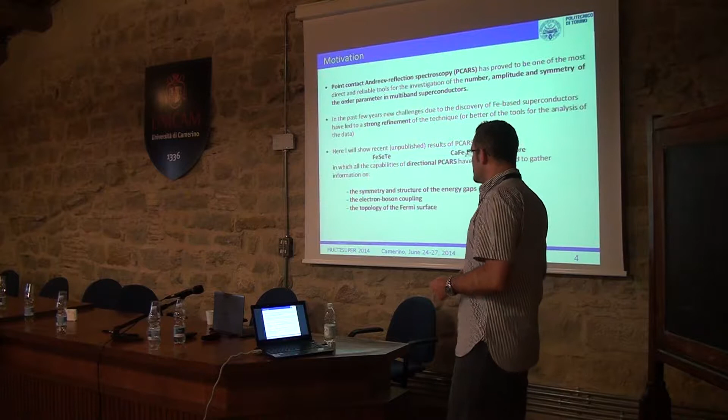Here, I will show some recent, still unpublished results of our group in iron selenium tellurium and CaFe2As2 under pressure, in which all the capabilities of point contact spectroscopy have been exploited, in particular its sensitivity to the symmetry and the structure of the energy gaps or order parameters, its sensitivity to the electron-boson coupling, and its sensitivity, which is in some sense only qualitative, to the topology of the Fermi surface.

Well, point contact spectroscopy is a very simple technique, powerful but very simple. It consists simply in making a small contact between a normal metal and a superconductor. We use what's called the soft technique, in which there is a gold wire which is stretched across the sample surface and kept in place by a small drop of silver paste. In this case, the contact is actually not only one, but a network of contacts established between single silver grains and the crystal surface.

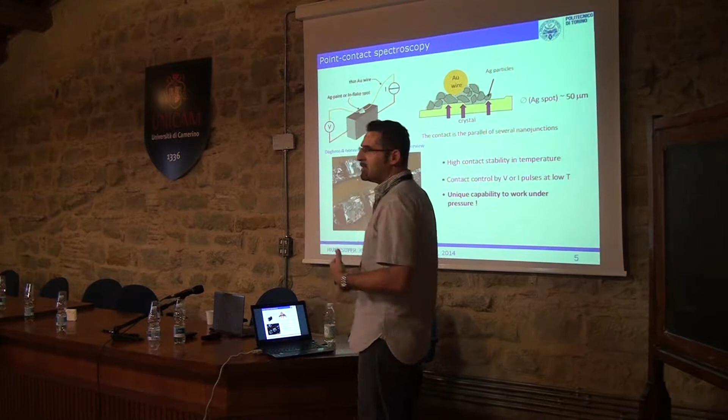Note that this is a sort of spatial average of the signal, and this setup allows high contact stability in temperature. It still allows to control the resistance of the contact by applying short voltage or current pulses that change the network of nanocontacts, and it has the unique capability to be used also when the sample is enclosed, for example, in a pressure cell, which is essential in this case.

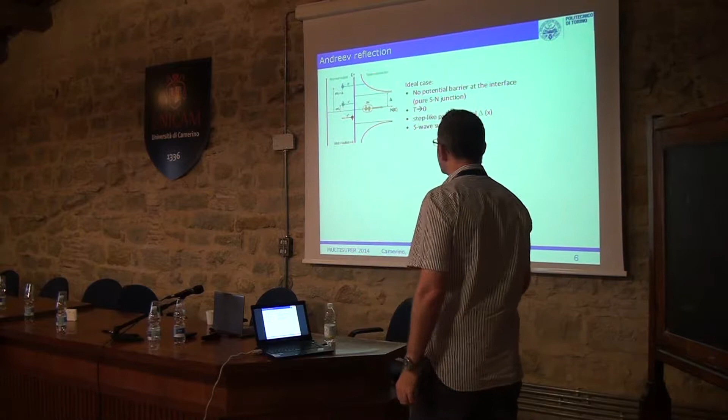Well, Andreev reflection is, of course, the mechanism that allows point contact to measure the gap. I will skip the details. The important thing from our point of view is that in the very ideal case where we have one-directional injection, an s-wave superconductor, T equal to 0, and so on, we expect a doubling of the conductance of the junction in an energy range between minus delta and plus delta.

The problem is, depending on how I express explicitly these quantities, I have different models. The first model was the 1D BTK model. It dates back to 1982. It's for only one direction of injection. So it can be used only when you have an isotropic order parameter, because you lose completely the dependence on the direction.

The 2D BTK model, which is the one which is mostly used in most of the papers, can account for an in-plane anisotropy like in cuprates, but it has also 3 parameters. Normally, this is also used for MgB2 and so on in a multi-band case. So in that case, the contribution of different bands is simply summed with a weight which is specific for each band. But this is also only an approximation. This is true only in an approximate way.

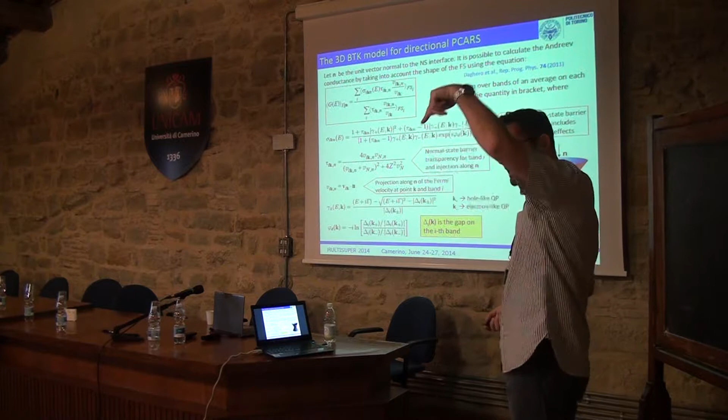The 3D BTK model is intrinsically multiband, because you can have as many bands as you want. Suppose this is the Fermi surface sheet, then this is the direction of current injection, in this case it's vertical. Then the normalized conductance is expressed by this ratio.

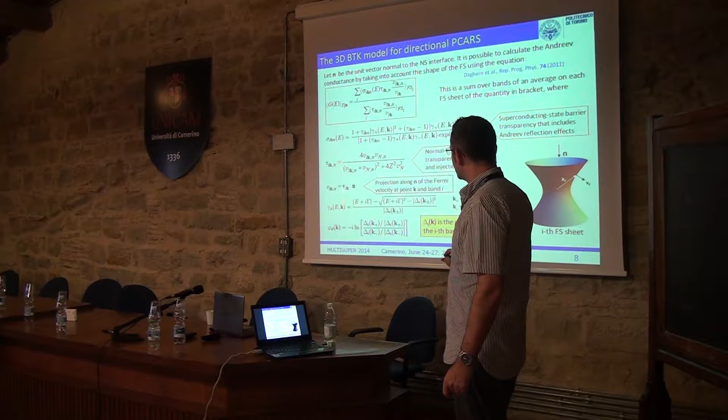Here you have a sum over the sheets of the Fermi surface, and this is an average over the ith Fermi surface sheet. These quantities contain only information about the shape of the Fermi surface, and this quantity contains instead, through these functions here, the information about the order parameter that can have in principle any dependency on the wave vector. So this is the model we are going to use later.

An example is the application to MgB2. It really works, because this is the Fermi surface from DFT calculations. Just to have easier calculations, we use a model Fermi surface that keeps the most prominent features of the original one. And then if we associate to the pi band the pi gap from first principles and to the sigma band the sigma band gap from first principles, we can obtain spectra that perfectly fit the experimental ones.

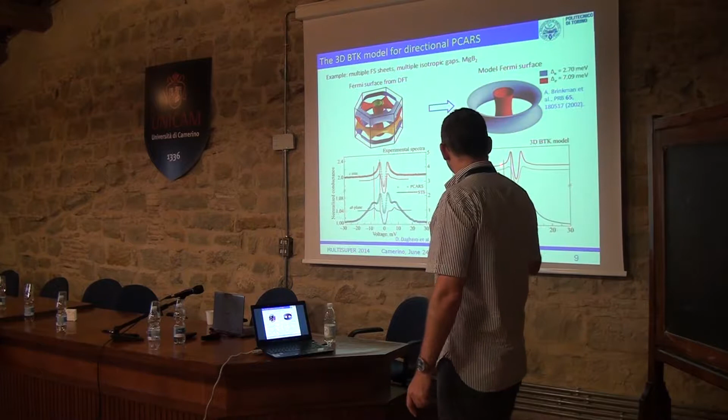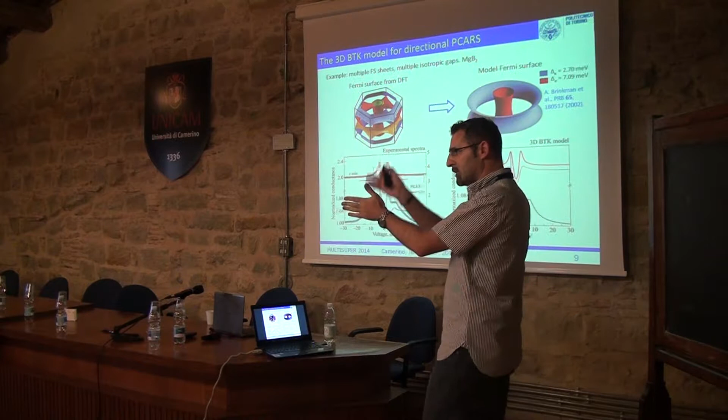Of course, here we have additional parameters. That means the Z, which is the parameter that controls the height of the potential barrier between the normal metal and the superconductor. But actually, the shape of the curves is perfectly well reproduced. Note that in the 3D BTK model, the weight of the different bands is not a parameter because it is given by the shape of the Fermi surface.

One thing that I would like to remark is that, suppose that you have two Fermi surfaces like this one, and suppose that you have a gap that resides on this Fermi surface, which is almost 2D, and that has vertical lines of nodes. In this case, if you use the 3D BTK model, you see that for injection along the AB plane, you will see a zero bias maximum. The zero bias maximum is the hallmark of this in-plane anisotropy of the gap.

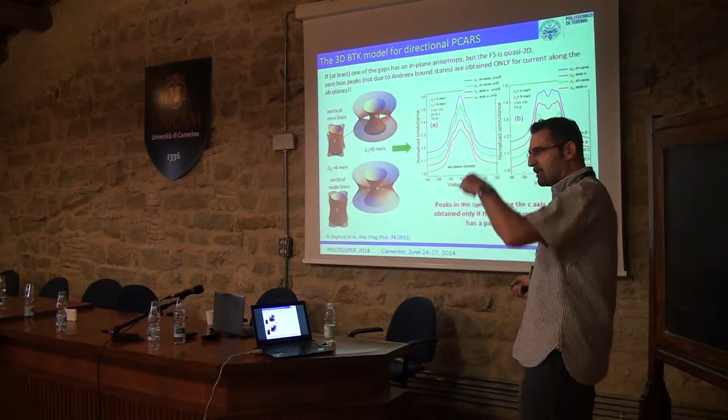But if this is the case, if you inject the current vertically, that means along the C direction, you don't see a zero bias maximum, but a zero bias minimum. This is an effect of the shape of the Fermi surface. So, if we observe peaks in the experimental spectra for injection along the C-axis, and this is the case I will show you later, this means that for sure we are not in this condition.

Rather, the condition could be something similar to this one. If the Fermi surface that hosts the anisotropic gaps is closed, is completely 3D, then you have peaks both along the AB plane and along the C-axis like this.

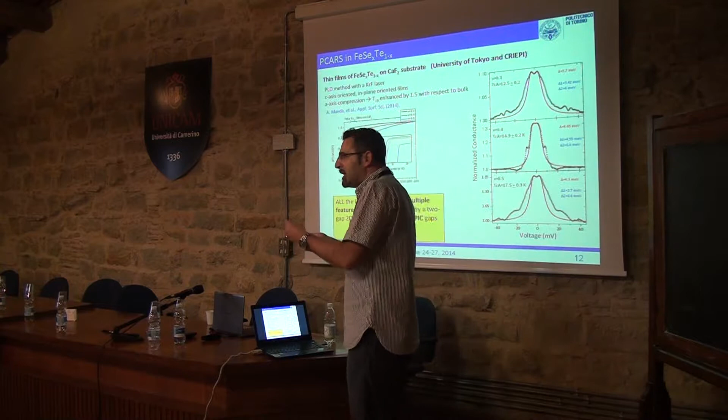Keep this in mind for the following. Okay, these are point contact spectroscopy measurements in iron, selenium, and tellurium films. These films have been grown on calcium fluoride substrate in Tokyo by PLD method. They are very well oriented along the C-axis and in the plane. So, from the point of view of spectroscopy, they look like single crystalline junctions. So we perfectly know the direction of the current injection with respect to the crystallographic axis.

These are 3 examples of spectra taken in 30%, 40%, and 50% selenium content. All the spectra show multiple features, so that if you fit the spectra by using a single gap, a single band BTK model, you completely lose a big part of the curves. Then it is possible to fit them by using a 2-band BTK model, and the fit is almost perfect.

Okay, then we plot the values of the gaps extracted from the fit as a function of the critical temperature of each contact. And what we obtain is this one. Well, it's a nice picture. We have apparently two gaps that scale with TC. This is the local TC of each contact. But look here. 2Δ/kTc of 11, a little bit too much. And so it's clear that this value is really huge.

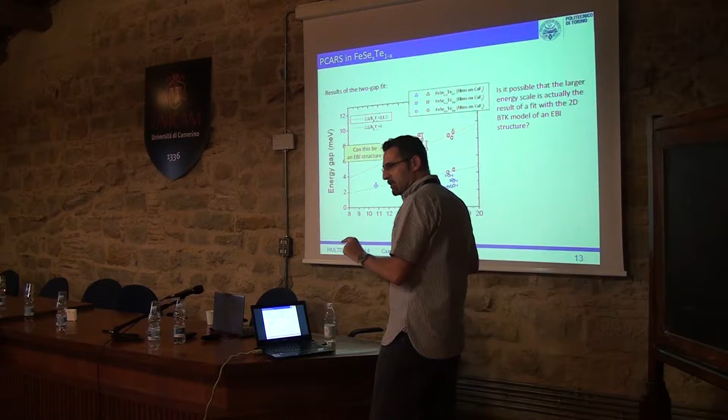So we were wondering, can this be something which is not a gap? So maybe these additional shoulders are not gaps, but we are mistaking them for gaps, and fitting them even though they are not gaps. So to check whether these values are actually due to the fit of electron-boson interaction structures, we performed some calculation within the Eliashberg model.

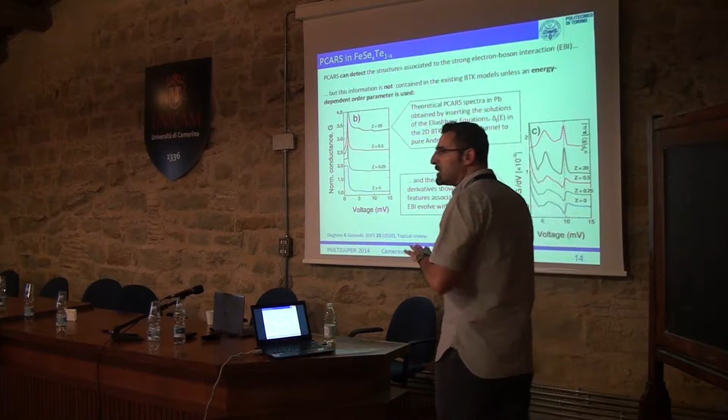Why Eliashberg? Because point contact can detect the structures associated to the strong electron-boson, electron-phonon, whatever interaction, but the BTK models do not contain this information. So to be able to see, reproduce and analyze these structures, one needs to calculate the energy-dependent gaps from Eliashberg, put these energy-dependent gaps in the BTK model, and in such a way, the BTK model reproduces these features.

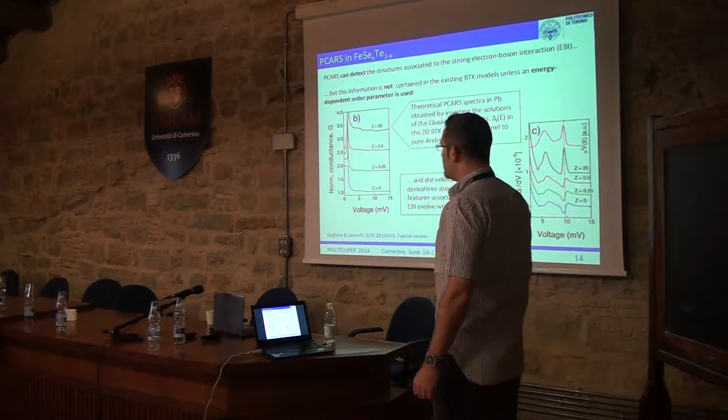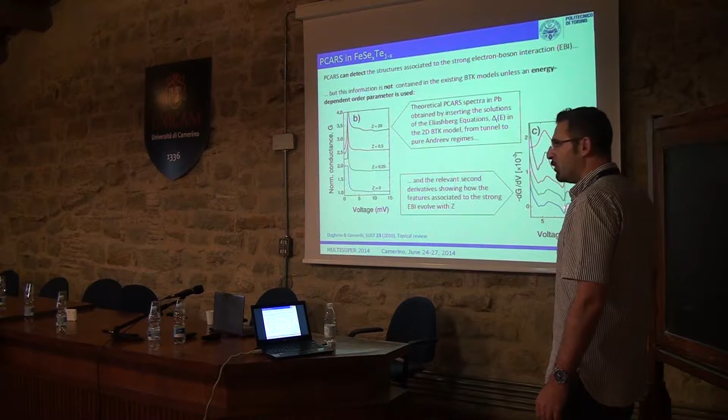For example, this is the case of lead. You see these typical, very well-known fluctuations around the BCS density of states. Z equal to 20 means tunneling regime. If you go toward the Andreev reflection regime, Z equal to 0, you see that they still persist. And there is a perfect correspondence between the peaks in the second derivative of the conductance with the peaks in the α²F. This correspondence is no longer perfectly obeyed in the Andreev reflection regime, but anyway, the structures are there.

So we use an effective three-band model. The sample is maybe not three-band, but the effective three-band is the minimal model that can reproduce our results. So we use this minimal three-band model, supposing that the coupling is due to spin fluctuations. I'm not saying that I'm sure that they are, but suppose that they are spin fluctuations. So the Lorentzian shape mimics the shape of the spin fluctuation spectrum. The peak is put at this energy that corresponds to this law, found experimentally, that relates the TC to the energy of the spin resonance. We need the ratio of the density of states, but this is a detail. We obtain the gaps in such a way that they lie here, okay?

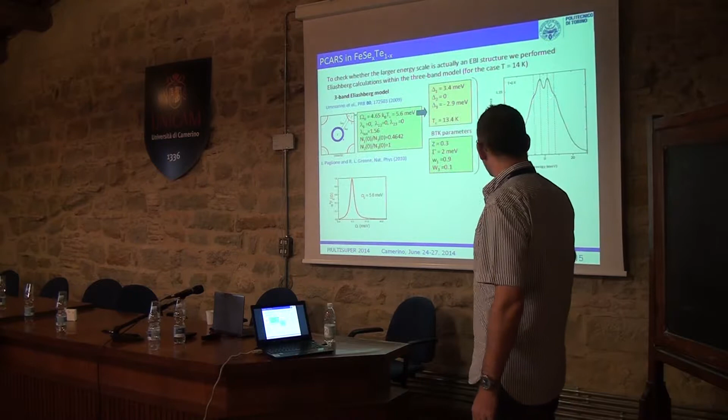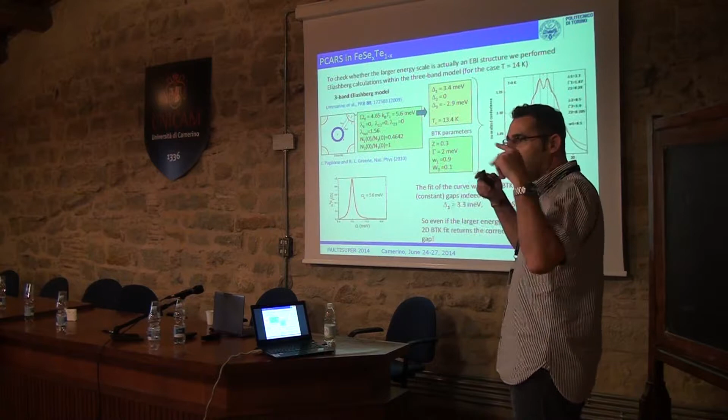So supposing this is really a gap, what is the position of the electron-boson structures? And the answer is this curve. So the gap is this one. These are the electron-boson structures. And if we fit this curve by using the 2-band BTK model, this is the red line, we obtain a gap which is exactly the gap we have put in. So it's the real gap, plus a fake gap at 8.5.

So this means that going back to our picture, this is really a gap, this is not a gap. And so we have only one gap that seems to have 2Δ/kTc of the order of 6. But here, what happens here? Because we have blue and red data.

This simply means that in some curves, we do not have a very big structure associated with the electron-boson coupling, but we have very clear structures still associated with the two gaps. So it's possible to fit the curve with two gaps, one here and one there. Well, this is complicated. Then what is the real gap?

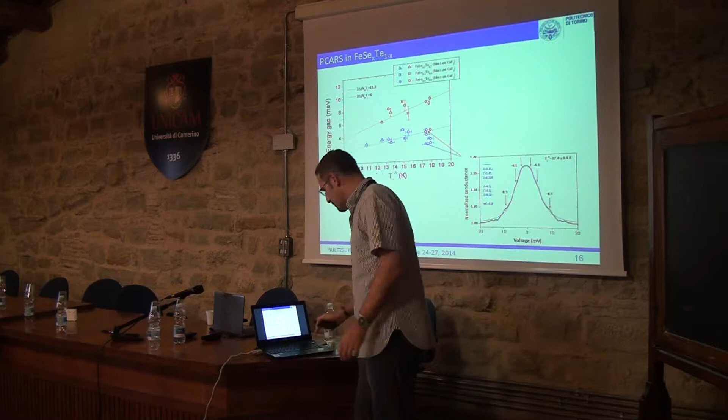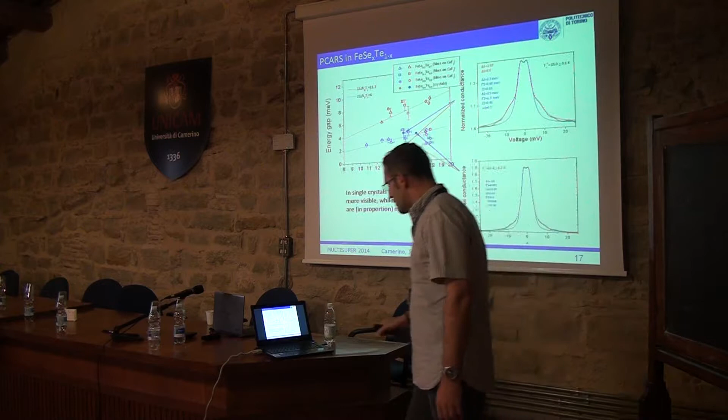In single crystals, the electron-boson structure is much lower, and the superconducting signal is much higher. But anyway, we can fit this curve with two gaps, and the two gaps lie one here and one there. So in the end, it turns out that we actually are in this condition. There are really two gaps.

They are not seen at the same time always. Sometimes you see the small one and the boson. Sometimes you see the large one and the boson. Sometimes you see the small one and the large one together. And this scale we can see in this way. Note that this is, as far as I know, the first analysis of this system as a function of doping, or TC if you want.

If you plot the data from literature, there is a very nice agreement. In particular, these are data from STS. This is the recent paper by Dr. Pan's group. So this one and this one, okay. And these are data from ARPES. They see three gaps, 1.7, 2.5, and 4. We cannot distinguish between these two small gaps, this one and this one, but the large one perfectly fits in our picture.

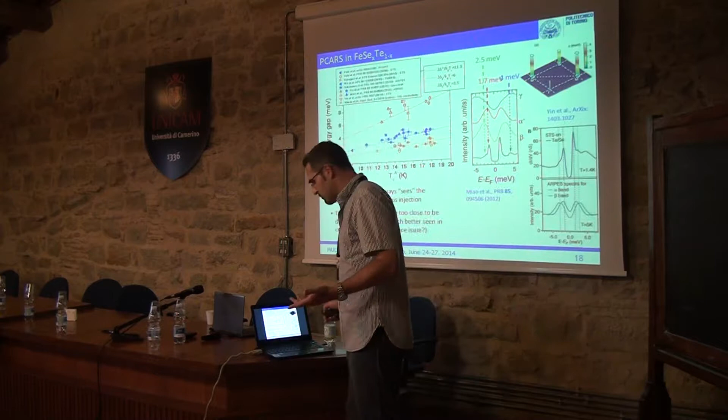By the way, all these fits have been done by using isotropic gaps, so we do not have any clear evidence of the fact that the gap is anisotropic. So the fourfold oscillations in the gap observed by angular dependent specific heat apparently do not appear, but neither do they appear in ARPES measurements. So the reason for this disagreement is not known to me.

Well, let's go now to calcium 122 under pressure. This is the phase diagram. At ambient pressure, calcium 122 has a tetragonal to orthorhombic phase transition, which is associated also to the onset of the antiferromagnetic phase. In hydrostatic pressure, it shows a tetragonal to collapsed tetragonal phase, the one that has been already described by Dr. Paglione.

In this phase, as already said before, there is no hole-like Fermi surface around gamma. There are no spin fluctuations. This has been proved experimentally and also calculated. The magnetic moment is completely quenched, and there is no superconductivity. But this system is superconducting under pressure, provided that the pressure is not completely hydrostatic.

If you have at least one uniaxial component, you can observe the superconductivity, and this superconductivity is always confined to a small volume fraction, as we have seen before, and it's thought that this superconductivity is associated to a tetragonal phase which is not collapsed, which is still paramagnetic, and that hosts superconductivity. And this T prime phase coexists with the collapsed tetragonal phase.

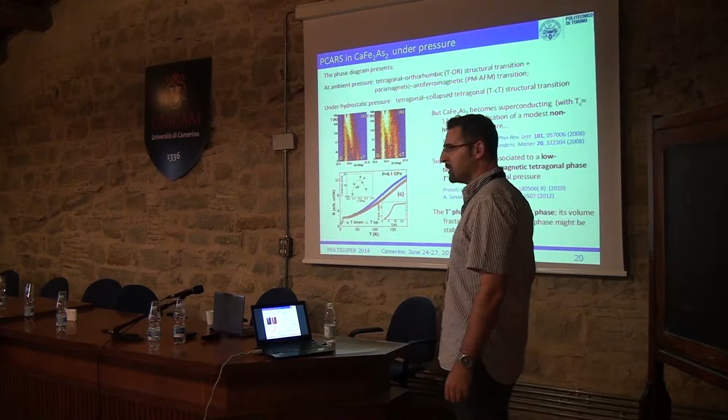These are XRD data. You see that this is the orthorhombic, this is T prime, and this is the collapsed tetragonal phase. So we are wondering, what happens here? What is the Fermi surface here? What happens to the gap here? What are the characteristics of the superconducting phase in this case?

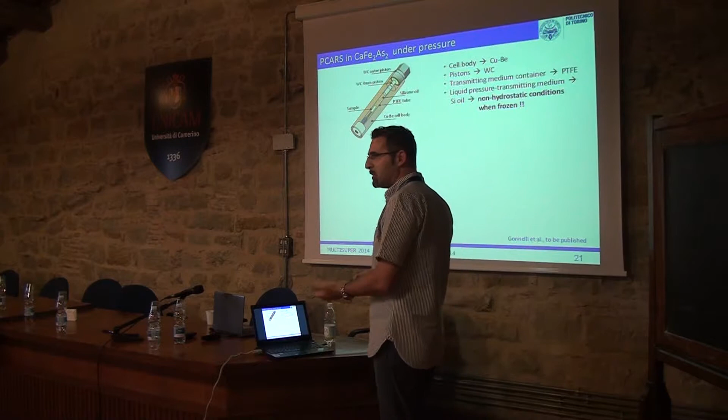Then this is the mounting of the sample. The sample is in a pressure cell. The pressure transmitting medium is silicone oil, which applies a hydrostatic pressure at room temperature, but when it freezes, it applies a pressure which is no longer hydrostatic. And this is what we need because we want to observe superconductivity, of course. This is a sketch of the mounting inside.

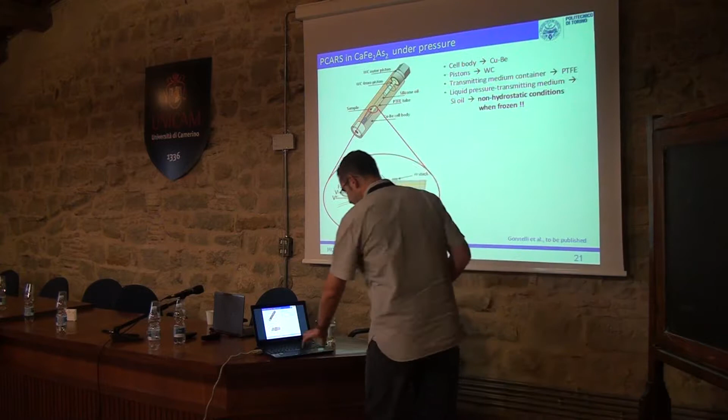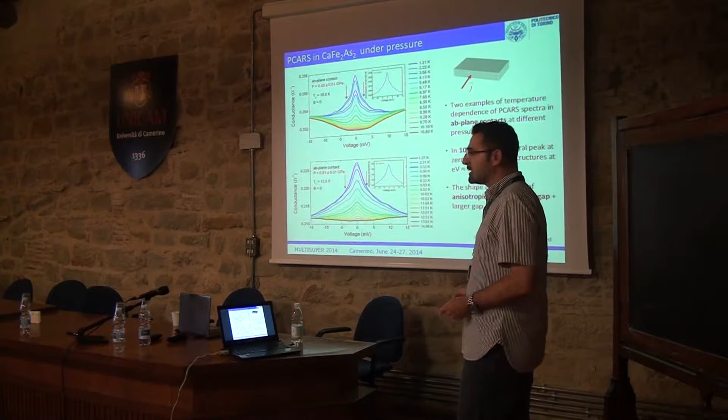These are two examples of spectra. These are, as far as I know, the first spectra of point contact measurement ever taken in a sample under pressure, because mounting is absolutely not trivial. And this is for 0.4, this is for 0.6 gigapascal. You see that all of them show a zero bias maximum plus structures. This is very similar to what I have shown before.

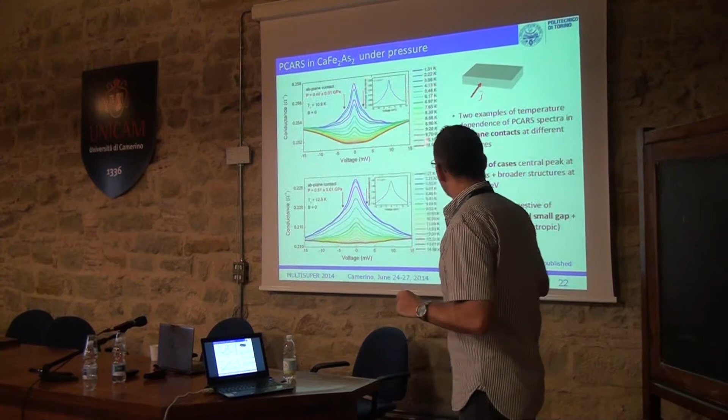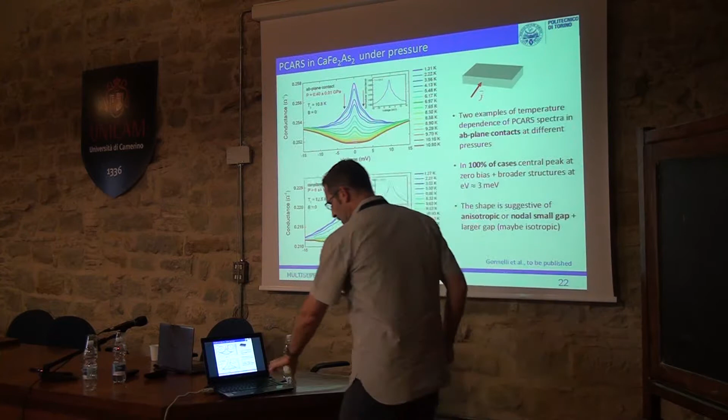By the way, the current here is injected along the ab plane. This is suggestive of an anisotropic order parameter. But what happens if we inject the current along the c-axis? Because this is the final test. If we inject the current along the c-axis, we still see the same structure, the zero bias maximum plus additional structures.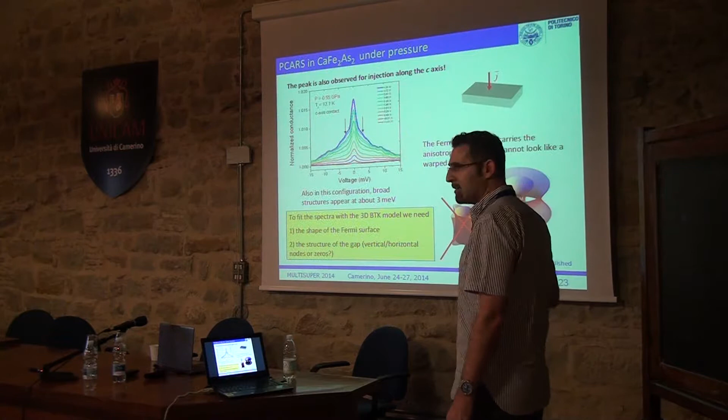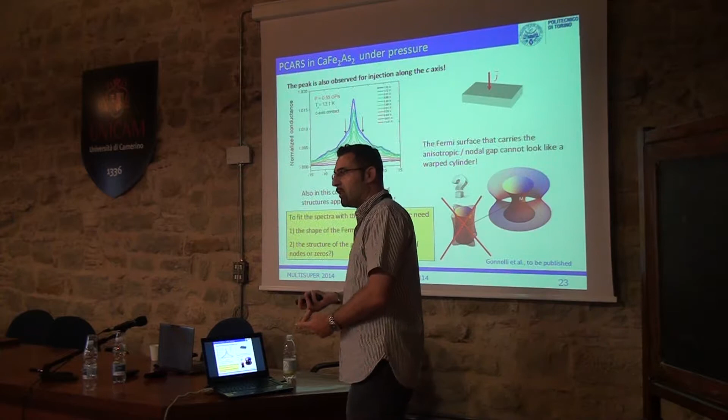So for sure, the Fermi surface that hosts this gap, the small gap, which is anisotropic, is not 2D. And so to go further in the fit of the curves by using the 3D BTK model, we need the DFT calculation of the Fermi surface and calculation of the order parameter structure to know exactly what is the shape of these nodes, okay, or zeros.

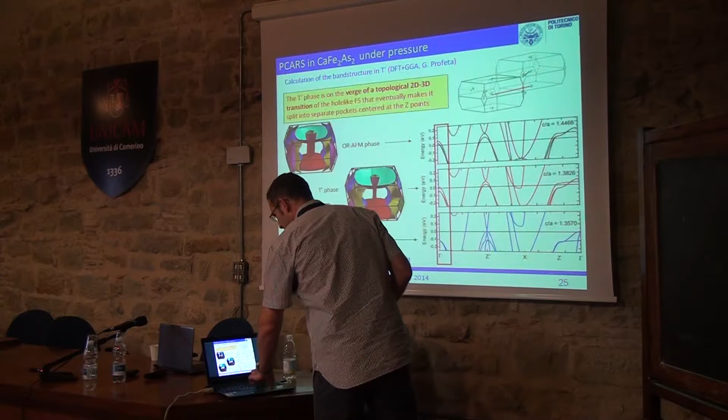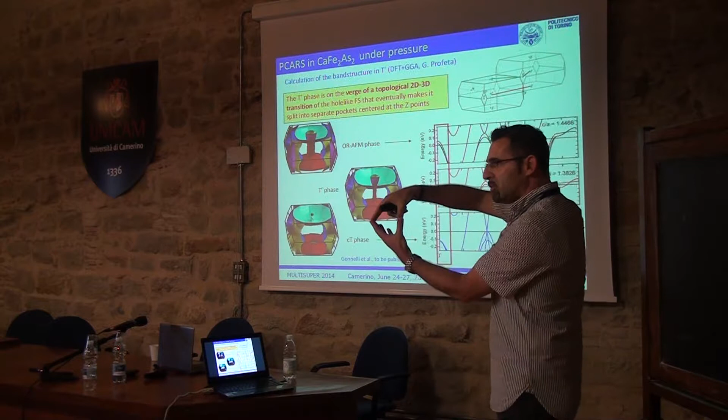And what is the Fermi surface in T prime? Again, we are on the verge of a Lifshitz transition, because this is the antiferromagnetic phase, this is the collapsed phase, and this is T prime. So the Fermi surface is going to split into separate pockets. And this is very interesting because it, again, is in agreement with what we have seen before. And this is just a picture of the band structure. You see that there is a progressive disappearance of the hole-like band around the point gamma.

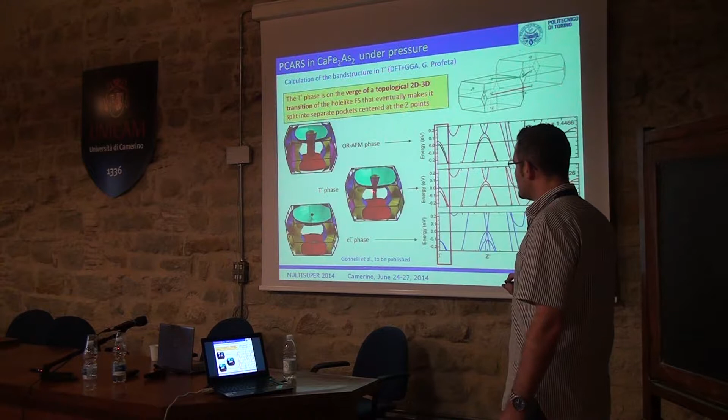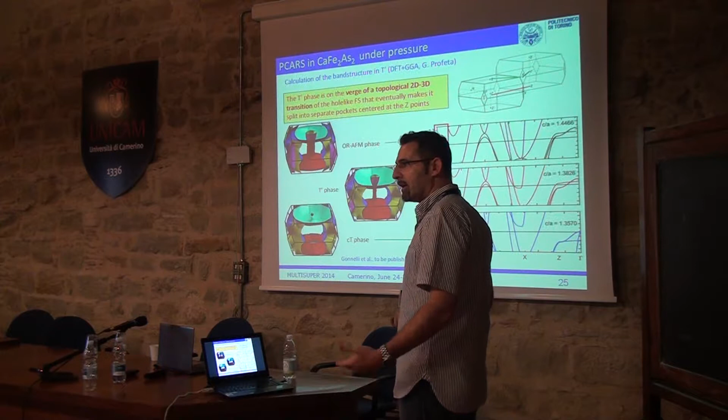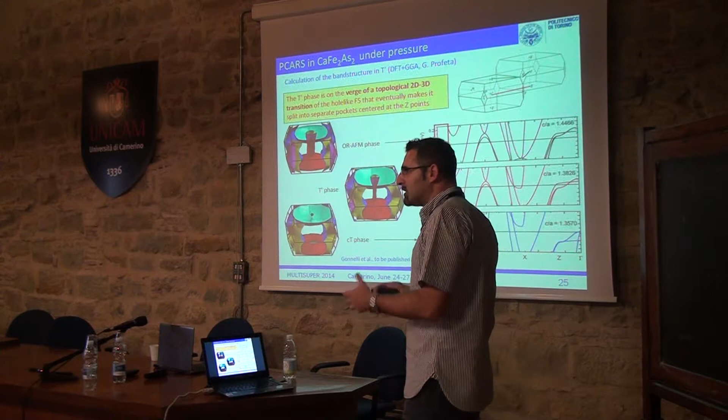And now we know that this is the Fermi surface, and we know that this Fermi surface must also host gaps, one more or less isotropic and the other one which probably has an in-plane anisotropy and has some nodes or zeros, we don't know exactly. So what is the expected structure of the gap? We asked Dr. Suzuki to perform calculations within the 10-orbital model plus random phase approximation.

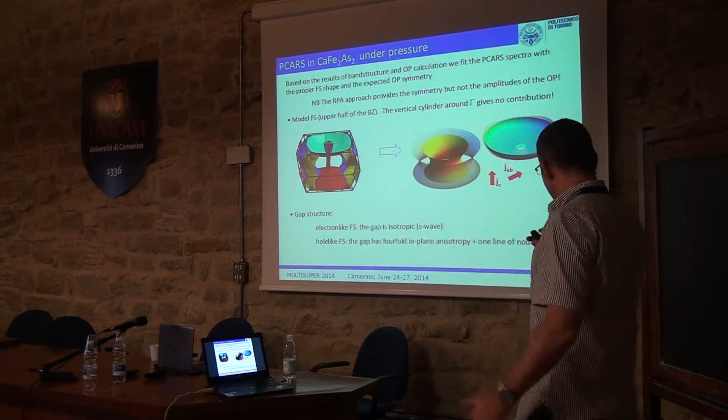So this is the Fermi surface. I did not show the gap because it is difficult to draw, but we mimicked this by using a model Fermi surface. It looks completely different only because for clarity I changed the proportions, and this is only the top half of the Fermi surface. This small cylinder here is neglected because for c-axis injection it has absolutely no effect, no weight, and for ab-plane injection it has a very small weight. By the way, this gridded surface is the gap. You see that it has a fourfold oscillation, but it has no vertical nodes, and the nodes are here where it crosses the Fermi surface.

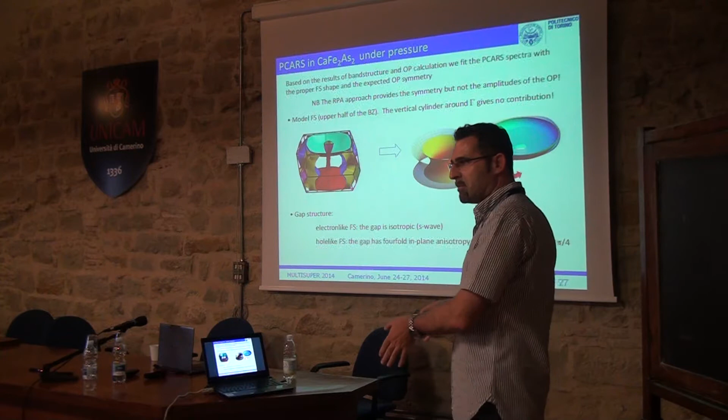With this geometry, we can put everything in the 3D BTK model and see whether we can fit the data, and the fit is very good. At all pressures, 0.4, 0.6, 0.8. We actually have 9 different cases, different pressures, and the fit is always rather good. It is also possible to determine the temperature dependence in particularly happy cases.

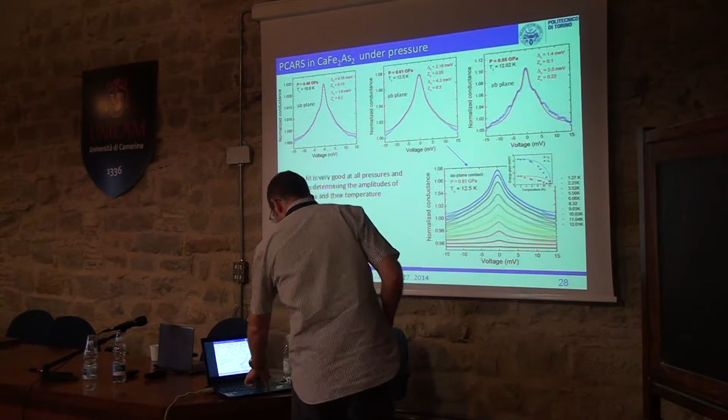Okay, here you see that these are the gaps. I would not stress this really because I don't have a very good evaluation yet of the uncertainty, but it seems that the gaps are both depressed below the so-called, let's say, BCS-like behavior. And especially, the fit works also for C-axis injection. And this is very important because it's a proof of the internal consistency.

Note that we have tried to change a little bit the shape of the Fermi surface, the position of the nodes, and so on. And this configuration, which corresponds to the one found by calculation, is the one that allows the best fit. So in the end, I can report the values of the gap amplitudes as a function of the pressure. You see, this is TC.

And the gaps, this is the electronlike gap, this is the holelike gap, they follow more or less the trend of the TC. But in correspondence to the pressure range between 0.55 and 0.6, they increase more than the TC. So the result is that if you calculate the 2Δ/kTC ratio, you see an increase in both gaps above the BCS value.

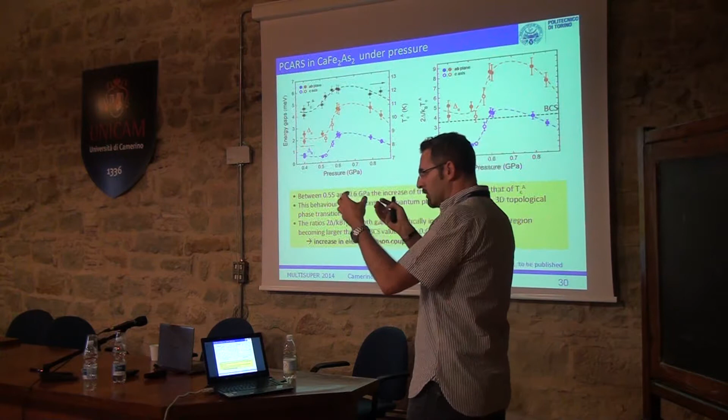So it seems that really at the position in pressure where you are going towards the collapsed tetragonal phase, so you are on the verge of a Lifshitz transition, you have a boost to superconductivity. I don't know really how to imagine this, but for sure this is something which is very interesting in the picture we were saying before.

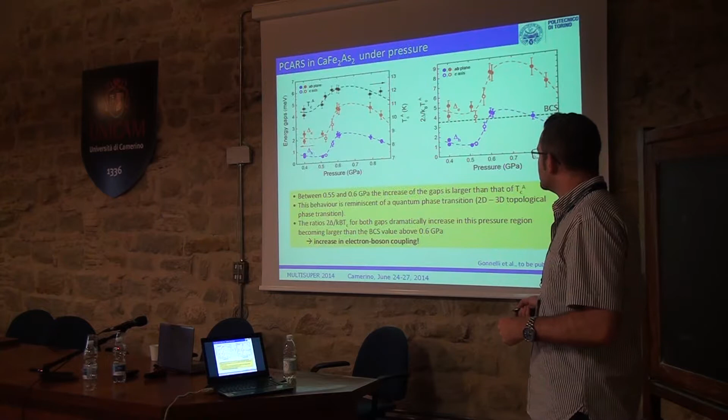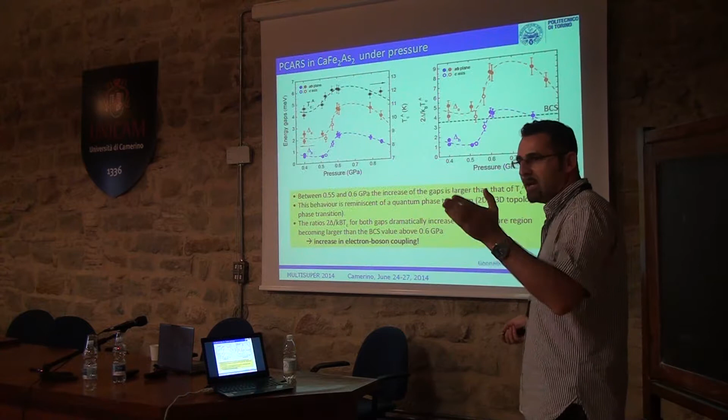So the natural question is, what is the role of spin fluctuations in this case? Are spin fluctuations really responsible for the pairing, or do they not have anything to do with pairing? And this is again similar to what both Borisenko and Bianconi have said, and also Paglione.

So, in conclusion, in iron selenium tellurium, you find evidence for two gaps without any clear evidence of anisotropy, plus a huge electron-boson interaction contribution. This electron-boson interaction really has an energy that corresponds to the energy expected for spin fluctuations. For calcium 122 under pressure, the point contact alone suggests an anisotropic gap that resides on a non-2D Fermi surface.

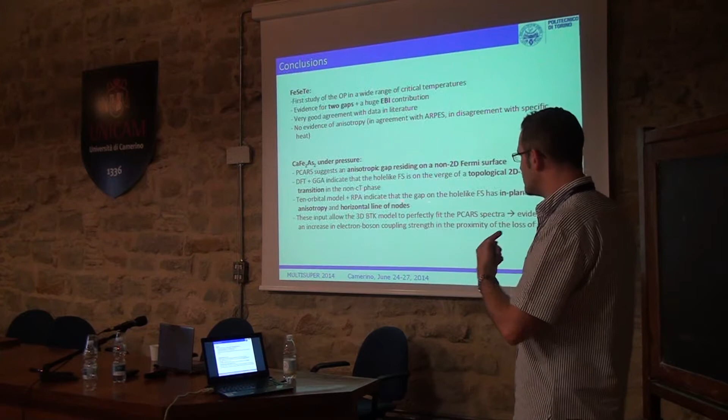Then we have done many calculations by DFT and by a ten-orbital model, and we have really confirmed that the Fermi surface that hosts the anisotropic gap is on the verge of a topological transition, let's say a Lifshitz transition. And the gap really has nodes, a horizontal line of nodes. This information allows us to perfectly fit the curves.

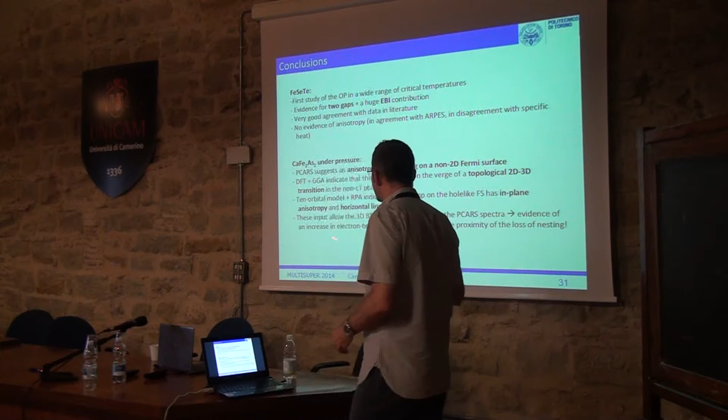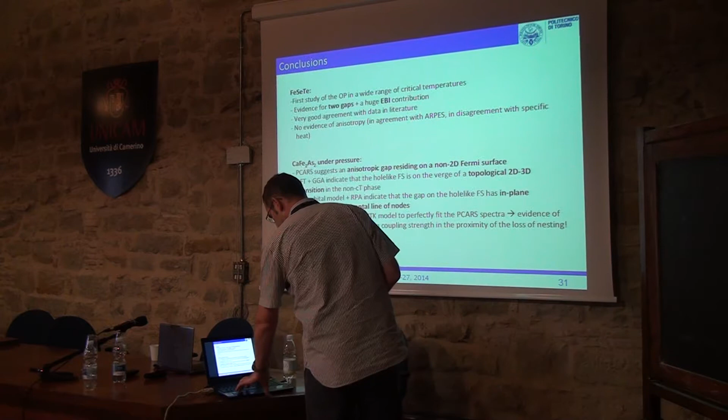And by the way, I would like to remark that this is a very complex set of experimental and theoretical techniques that, in principle, is very powerful. So it could be used also to analyze other compounds, like those shown by Professor Paglione before.

Open issues and future prospects. Okay, there are many open issues. One is, why don't we see any anisotropy in the gaps? Also in cobalt-doped barium 1-2-2, many measurements, for example Raman scattering and directional specific heat, see fourfold oscillations or loops of gap minima. We never see something like that.

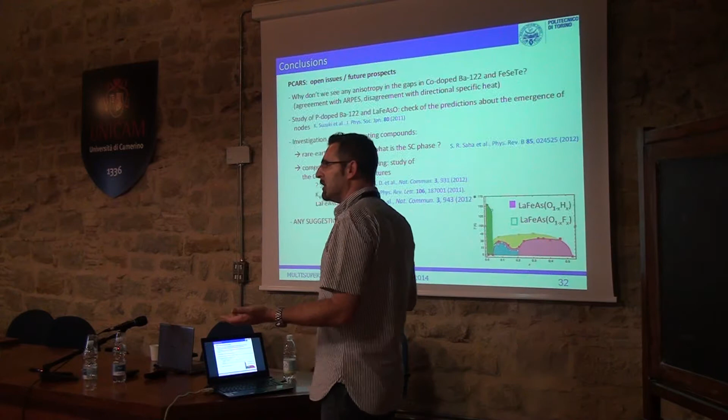We don't know why. Either our technique is not sensitive enough, but also ARPES, for example, does not see any oscillation. So this is an open question. Probably it's a difference between, I don't know, but I am asking, bulk and surface. I hope it is not the case, but maybe it is.

Then another interesting thing would be the study of phosphorus-doped barium 1-2-2 and lanthanum 1-1-1-1, because we would like to check the prediction about the emergence of nodes as a function of doping that was made by Dr. Suzuki. And another interesting thing could be the investigation of compounds like rare-earth-doped calcium 1-2-2, to understand what the superconducting phase is.

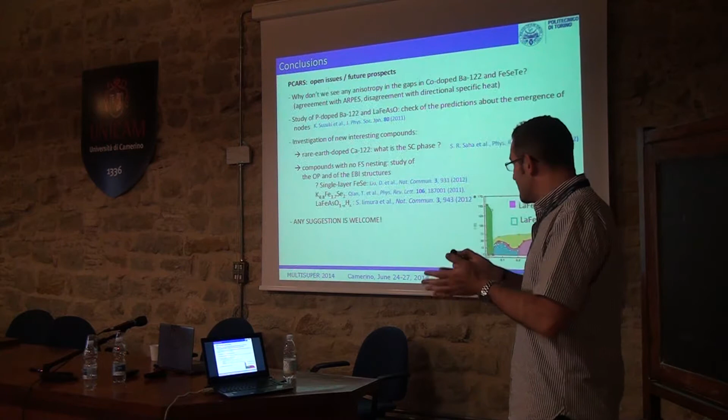Also in this case, there is a T prime tetragonal non-collapsed phase, or other compounds with no nesting, no Fermi surface nesting. For sure, point contact on this compound is out of question. In single layer, it is not possible. But in these layers, in this compound, maybe it would be interesting. And also in this one that has a strange double dome in the superconductivity. It is maybe very interesting.

But we are open to any question and any suggestion for future developments. We have this technique. It is not ARPES. It is not as powerful as others, but it is very simple in principle. It can be used in many compounds.

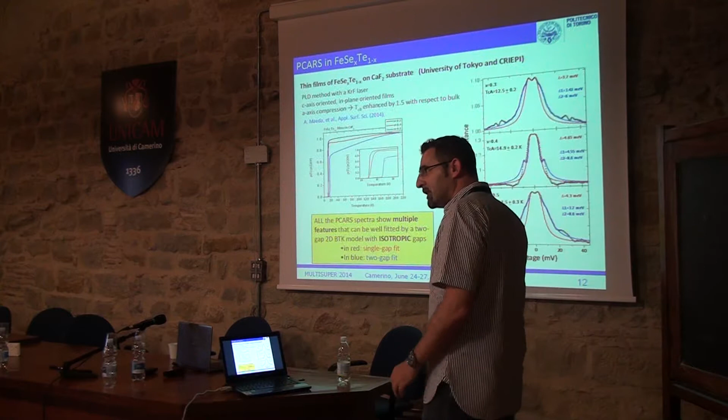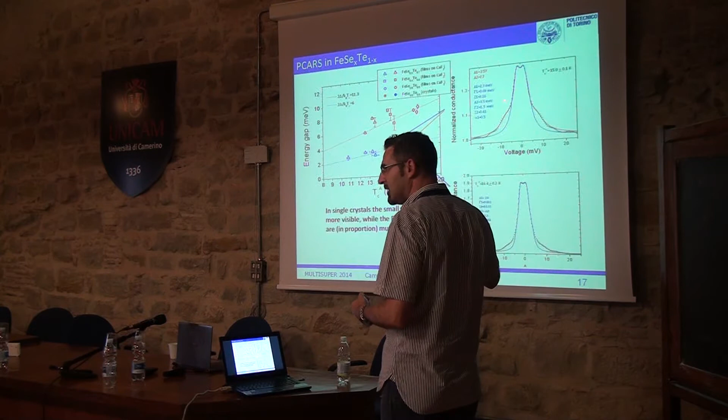I don't know the reason, but if you look, more or less, this structure has an amplitude of 0.1. But the superconducting signal as a whole is not greater than 1.15 in films. In single crystals, the height of the boson is the same, but the signal is almost 2. This goes to 1.3, this goes to 1.19, so it's the almost ideal SN junction. So I don't know the reason why this should have almost always the same weight, but it's a fact that the superconductivity signal in crystals is much higher.

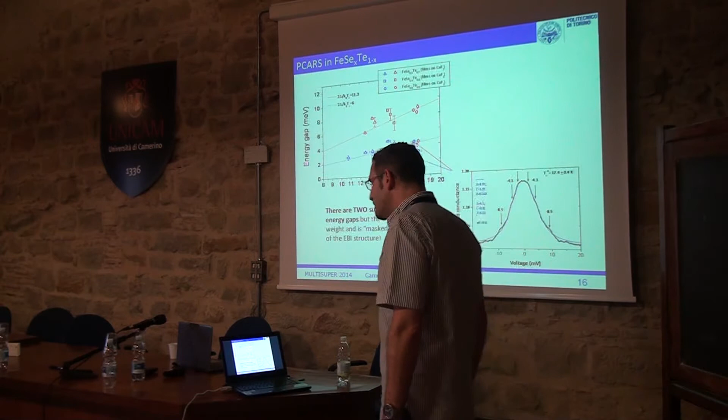This curve is an exception. This one, I have no explanation why. You don't see very clearly this picture. I don't know. But in the theory, what do you do to see or not the feature? So you don't have a specific parameter. Ah, you mean in the theory? Well, yes. We have made different calculations.

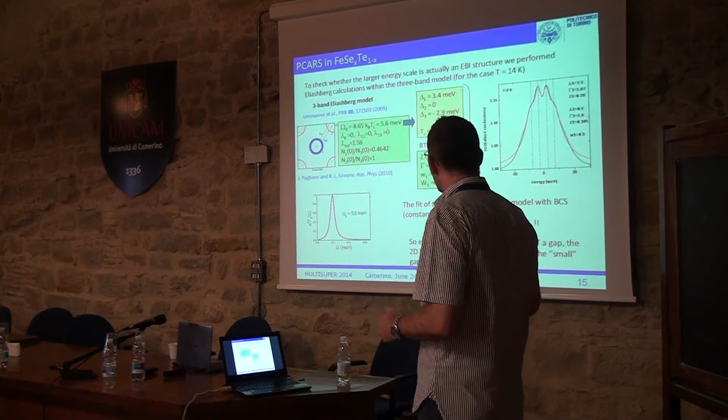You can make these shoulders more or less evident by changing essentially the lambda, because you have two different lambdas, which are free parameters. By tuning lambda 1,3 or lambda 1,2 in a different way, you can make them more or less visible. But it's a fact that also in reality they can be more or less visible. That I don't know why. So in the experiment there is a clear difference between films and bulk. Yes. In the theory you just choose the parameters. This was just an example, of course.

Just to show that if one gap is 3, the electron-boson coupling can be mistaken for a gap which is about 8. And if you go to delta plus boson energy, the peak would be delta plus, of course. Yes, of course. Delta plus omega. Yes. So I guess I sort of missed it.

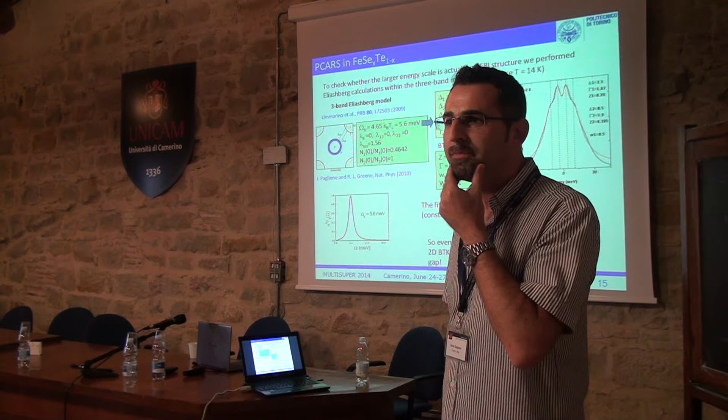Was the pressure that you're using to calculate the superconductivity uniaxial or hydrostatic? Actually, it is the pressure measured by measuring the superconducting transition of a piece of lead which is mounted below the sample. So just below the sample we have a sort of susceptometer. Here. And we measure the transition temperature of this lead, and there is a very well-known dependence of the transition temperature on the pressure.

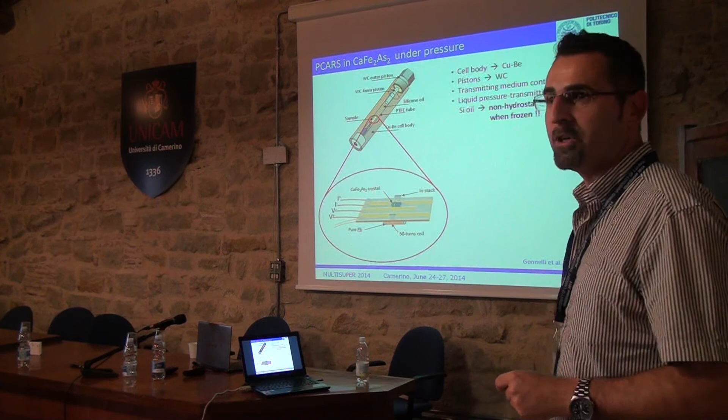Unfortunately, we have no way, at least as far as I know, to determine the amount of uniaxiality and the amount of hydrostaticity. Unfortunately, this is the strong limit of this kind of experiment. And the reason I ask is because there's some common idea that there's no superconductivity under hydrostatic pressure. Indeed. If you use helium, you would not see any superconductivity. And this is the reason why we use the silicone oil. In helium, it would be much easier to measure because you don't have the oil on top.

Actually, BKT transition, right? BKT? No, I'm talking about BTK, the model. No, it's not a topic.